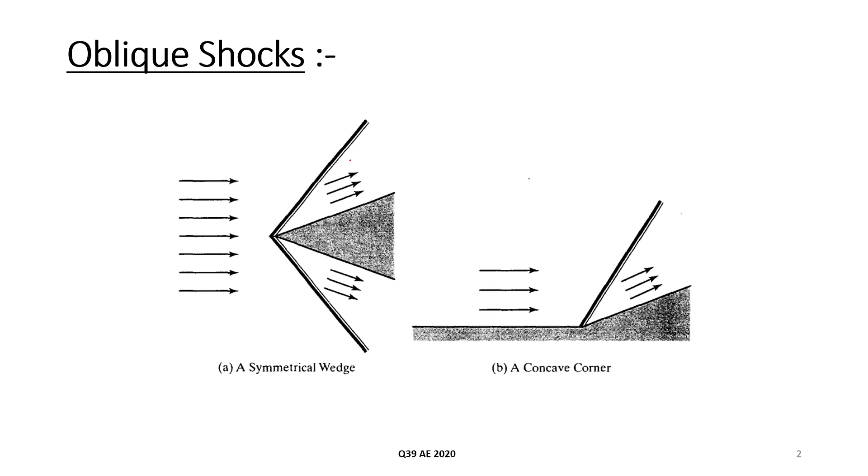So in solving the oblique shock problem, we take some assumptions: flow is steady through the wave, flow is 2D, it is inviscid, and this inviscid assumption is only applied upstream and downstream of the shock. In between, in this thin part of the shock, flow is highly viscous. Flow is also adiabatic, there is no external shaft work and no body force acting on the shock, and gas is calorically perfect gas.

So if we see the streamline, when a flow passes through this shock wave, the flow is deflected at angle theta, and the shock wave angle is beta. If you apply continuity, the velocity parallel to the shock wave will be the same, and flow normal to the shock wave will act the same as flow through a normal shock wave.

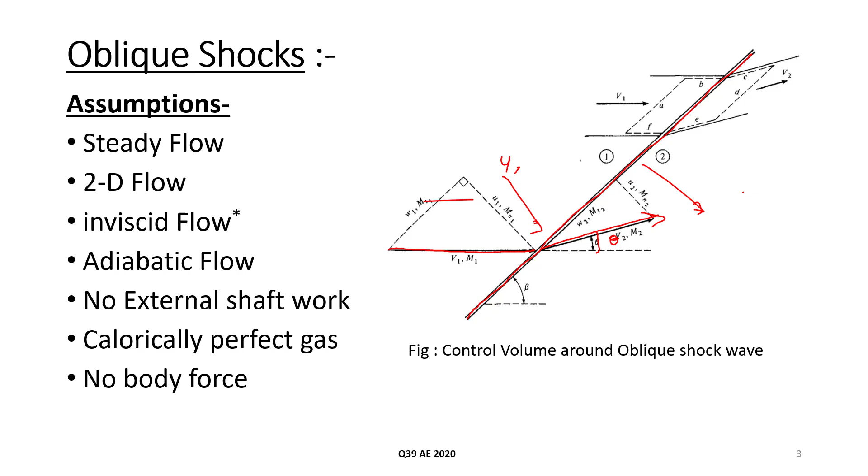So the velocity upstream is V1, M1 and downstream is V2. If we take the flow normal, it is u1 velocity and parallel velocity is w1. Similarly downstream, normal velocity is u2 and parallel is w2.

If we apply the governing equations, we get this type of governing equation. Continuity is rho1 u1 equal to rho2 u2. Momentum is p1 plus rho1 u1 square equal to p2 plus rho2 u2 square, and w1 equal to w2, for both directions normal and parallel to the shock. Energy equation is h plus u square upon 2 equal to constant, which is the stagnation enthalpy, and we can write it as h1 plus u1 square upon 2 equal to h2 plus u2 square upon 2.

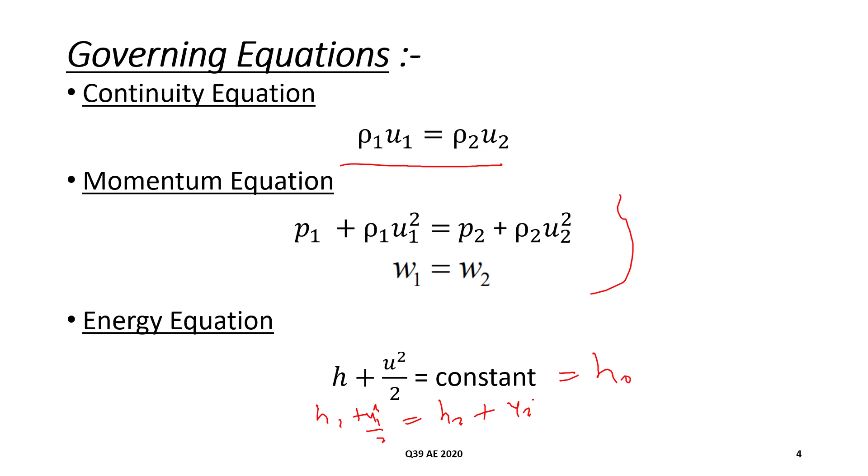We need some more equations to solve. Enthalpy is taken as h equal to cpT because gas is calorically perfect, and equation of state is P equal to rho RT as gas is perfect gas. So we can get some oblique shock relations. Mn1 is the normal Mach number, for the flow normal to the oblique shock wave. This is M1 sin beta. Using this Mn1, we can find the density, pressure, and temperature ratio.

Mn2 can be found using Mn1, and M2 can be found using Mn2. Besides this, there is also the theta beta M relation, where theta is the deflection angle, beta is the shock angle, and M is the upstream Mach number. So this is the theta beta M relation.

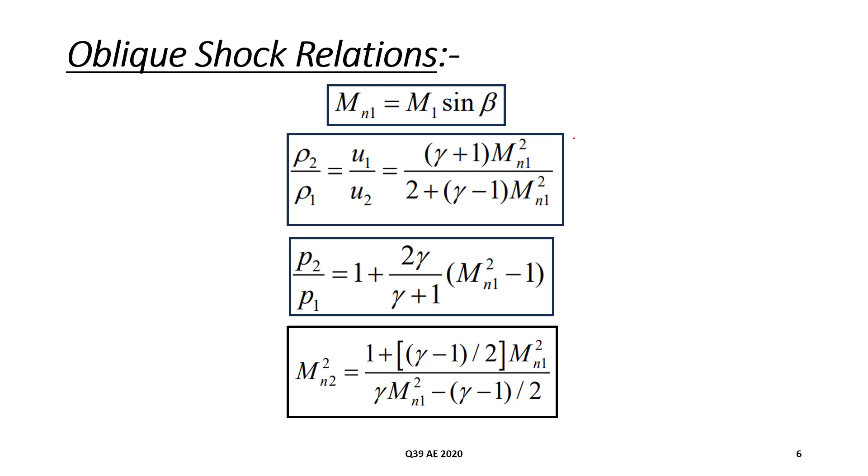Now we will solve the problem. We have to find the upstream Mach number, and we are given the shock wave angle and deflection angle. In the theta beta M relation there are only three parameters: theta, flow deflection angle, beta, shock angle, and M1, upstream Mach number. We have to find M1. We know the deflection angle is 5.75 degree and shock angle is 35 degree.

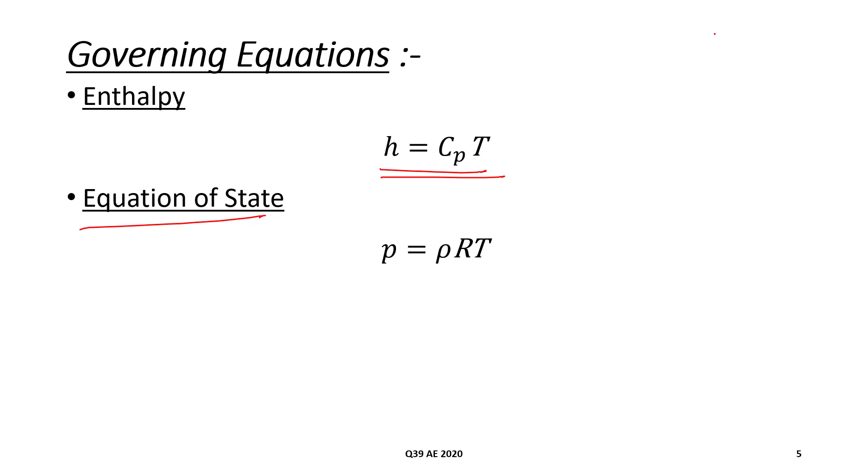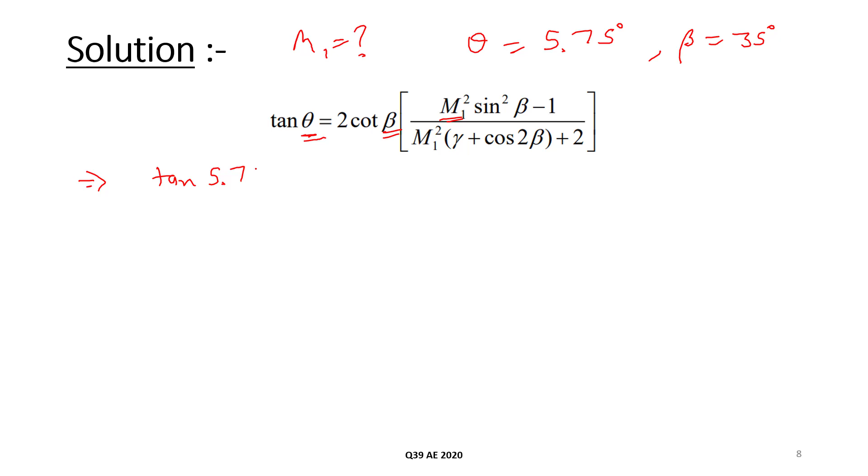So we will put the values in this equation. We get tan 5.75 equal to 2 cot 35 degree times M1 square sin square 35 degree minus 1 upon M1 square times gamma 1.4 plus cos 2 into 35, that is 70 degree, plus 2.

Using the calculator, tan 5.75 is 0.1006947. We will also divide it by cot 35, which is 1.428148.

M1 square sin square 35 is 0.3289899 M1 square, minus 1, upon M1 square into 1.4 plus cos 70, which is 1.74202, plus 2.

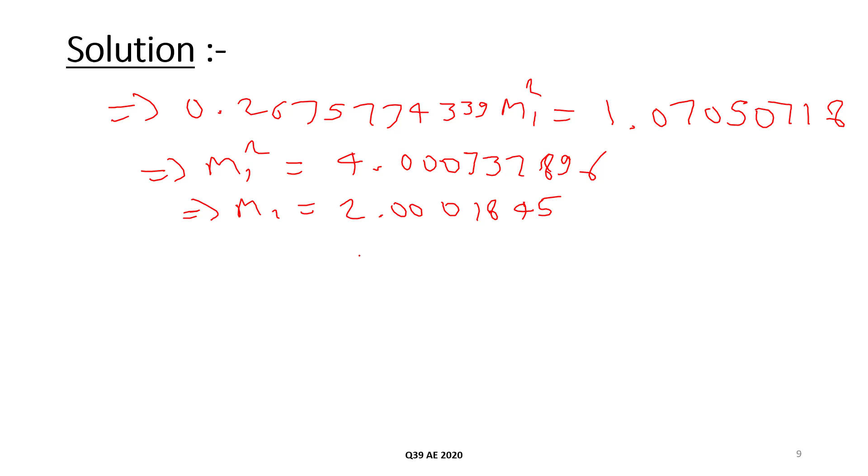1.07050718. So M1 square will be 4.000737896. So M1 will be 2.000184. So to one decimal place, 2.0. So our answer will be 2.0.